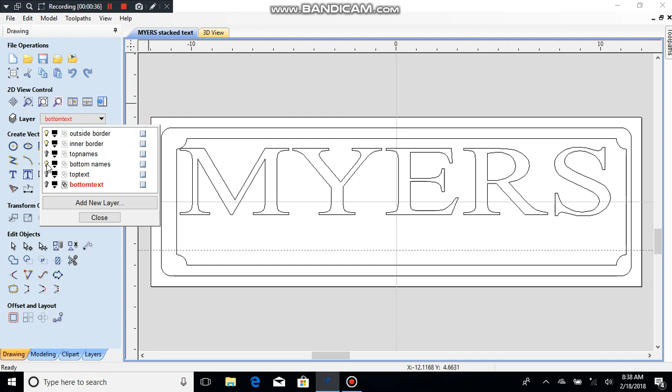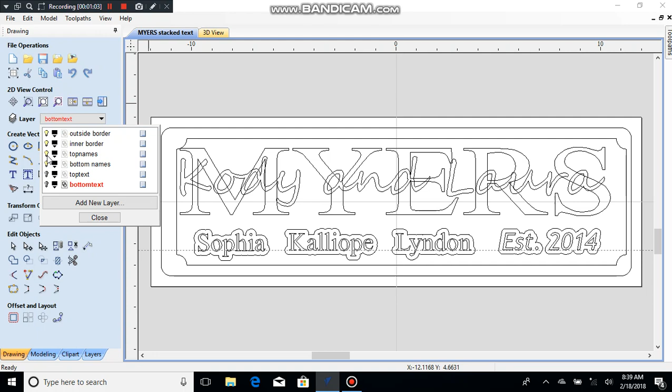I have all my layers turned off. So we're just going to go through: outside border, that's good, inner border, that's good. I can do top names and bottom names, but ultimately those aren't really being used—they're used as a guide. If I would have screwed up something on top text or bottom text, oh, and by the way, that was moved a little bit intentionally, don't sweat it. So if you screwed it up somehow, you could delete top text and bottom text and move it to that layer again in case something was wrong. That's the biggest benefit of having these multiple layers. But remember, the only thing we're actually working with is top text and bottom text, and this overlay problem, don't sweat it.

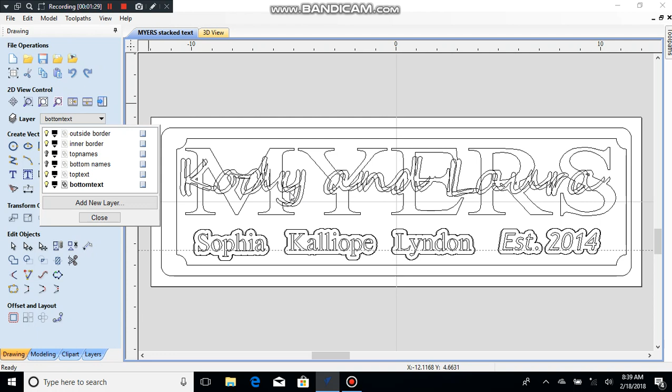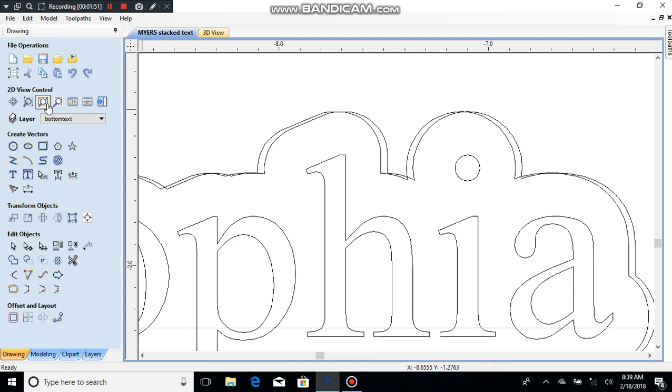Actually, technically, I could highlight that one and delete it, and we'd be back to where we're supposed to be—that's what it should look like. You actually see a little double vector there, again, that was just a mistake. See, I got two vectors here, so that was just a mistake, no big deal. Anyway, on your layers.

So next, basically like I said before, it's done. I don't need to do anything else with this—it's all about, and I've already set up all my tool paths. So what I'm going to do here is pin this so it stays in place. I'm going to go to preview and hit reset preview. There we go, so we'll start off fresh, and we're just going to review it.

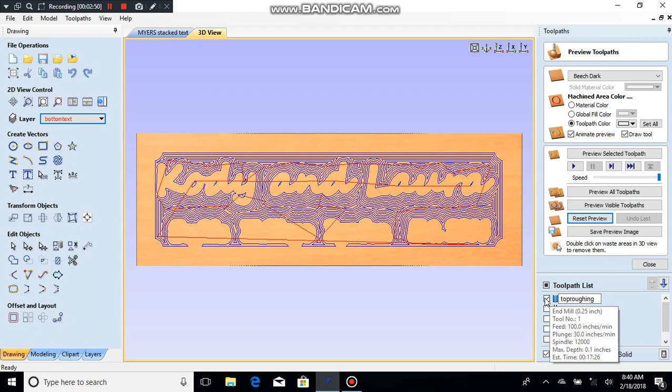So this is your top, top roughing—that's the first one you're going to run. I'm going to go ahead and rename this to top roughing, just my own choice of words so I know what I'm picking off my pendant when it's game time. So top roughing, and this one's top finish, is what I call it.

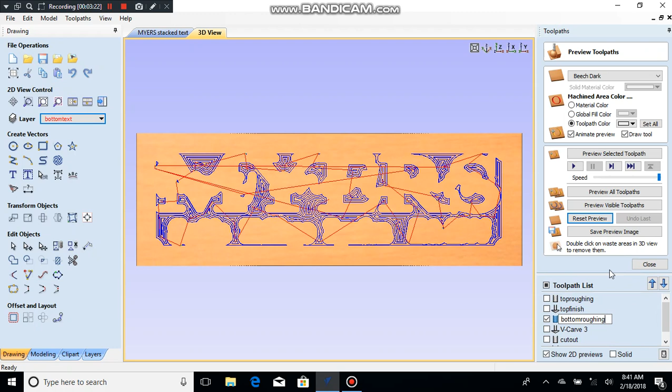Rename top finish, and then this should be bottom roughing—yeah, roughing out those shapes. So we're going to rename bottom roughing and check, and we're going to look at this one. That's your bottom finish, so let's rename that. I have no idea what that's all about. Sorry, alright, rename, and this is bottom finish. Now I guess I am going to add one more thing that I think is relevant—it's just something that can come up.

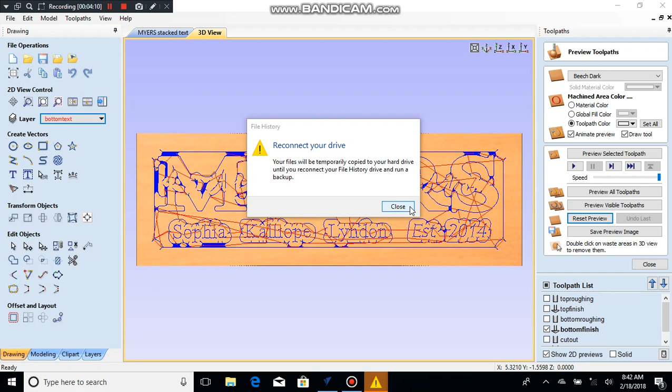I don't know what's going on with this computer. Okay, so last is cutout, and that's going to show us our cutout path. So we're good—kind of irritated with those pop-up screens popping up on me.

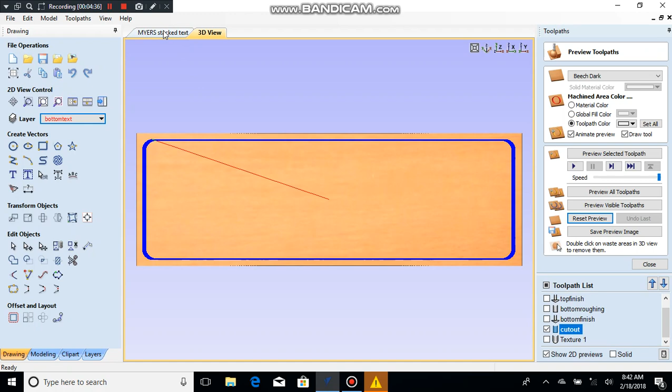One last thing to do, and I think this is relevant. Let's turn on everything on the bottom. These carvings here, of course, that's on the top layer. For some reason, if the zero is not exactly correct when it actually runs this, I've had this happen before where these particular texts don't carve as deep as I really want them to. So I'm going to make an extra file just in case that happens, so I can run it separately when it's all done.

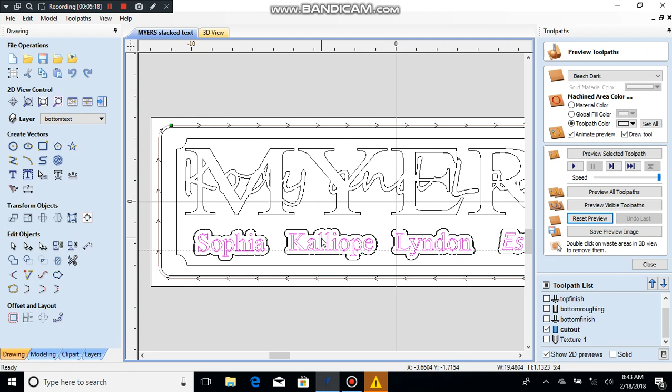If I want to clean it up a little bit, I can just vcarve these items, and I won't have to run a 2-hour file or whatever to make it happen. So let's do that, just like you normally would a vcarve. We're going to do... I don't particularly like 0.2, let's do 0.1. I don't need to flat that one because a 0.25 end mill is not going to fit in those, so I don't need to do it. And flat depth, and that's good.

And I'm going to call this final vcarve, just in case I need it. If I need it, I have it.

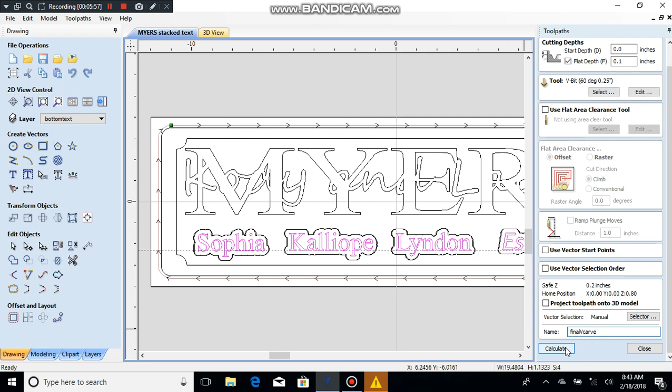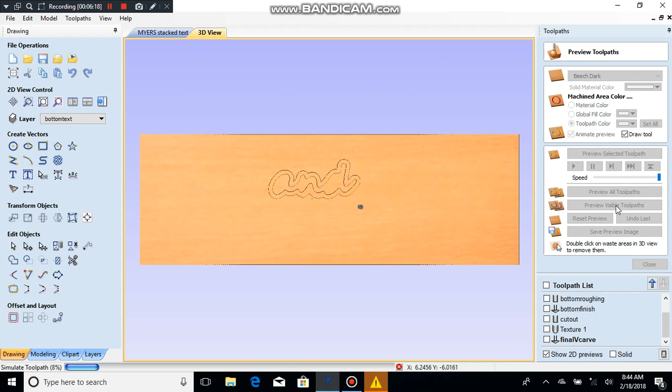Now lastly, some of this stuff has been moved slightly, my mistake, I just hit the wrong buttons. I'm going to highlight all my toolpaths and take out final vcarve. Alright, here I'm going to preview those visible toolpaths, so this should be what it's going to look like when it's all done.

This is going to take at least 2 or 3, maybe 4 hours to run. I don't know about 4, it's pushing it. This is actually slightly smaller than the other ones I've made.

Okay so what I'm going to do is run this final vcarve to make sure it's going to look okay, to see if it looks any different. So I'm going to preview that. Good, so nothing changed, nothing moved. Because imagine doing the whole thing, realizing those names have been moved slightly, and then you run that file and obliterate the whole thing.

So it is done. It's time to move these files, all these files, onto my disk, and they're all labeled appropriately. Forgive me, I'm going to go grab my thumb drive real quick, and we're going to get this done.

Okay, so I'm going to call this Myers. I'm plugging in my thumb drive right now. It should pop up. Give it just a second here. All right, here's my USB.

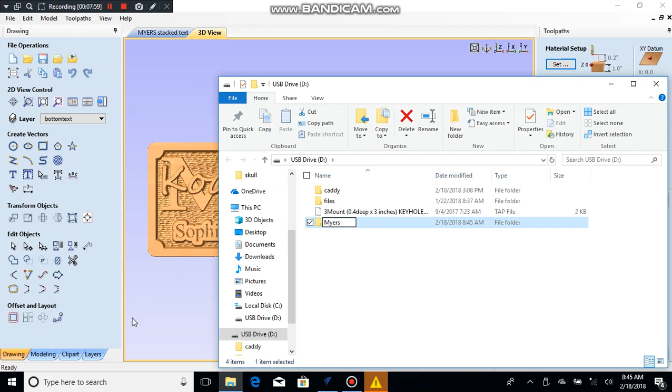Kill it, time to save these. Okay, so I'm gonna just do them in order. All right, top roughing. Now let's see my post processors for the laser, because the last time I ran it was a laser. Make sure you take it back to the one that I want. There's the post processor that I want, and we're gonna save.

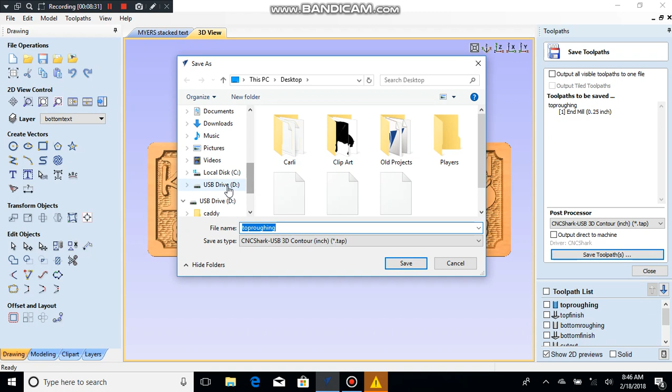We're gonna save top roughing to our D drive. There's Myers. All right, top roughing. Boom, done. Click on top finish.

Top finish is done. Those vcarves take a little bit longer to load onto the disk. Here's our bottom roughing, save. Bottom finish. Save. Cut out, save. This texturing is going to take absolutely the longest one.

I mean, if it's going to be slow, it's going to be this texture one, that's going to be the longest file. Save toolpath, this is our texturing. And here's that final vcarve that we just made. Save, and we are good. I'm going to give it a little bit of a delay to make sure it all gets on the disk.

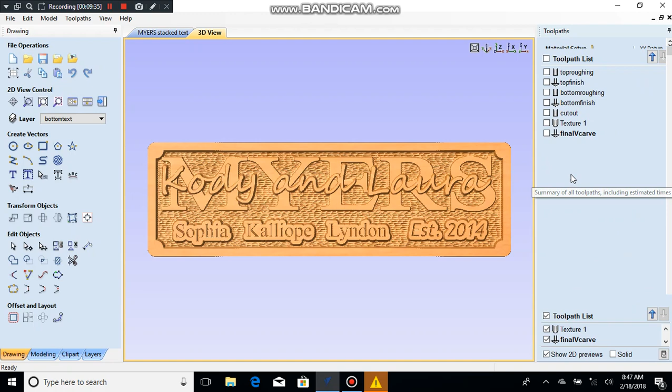And I guess I have like 30 seconds left on this video, so let's do our times real quick. Alright, so we're going to select everything. It says that this is going to take about 3 hours. I have found it takes about 25% longer than anything that it estimates.

And you can see the texturing is showing 1 hour and 35 minutes, that's going to be the longest. Top roughing is about 17. So it'll be, I don't know, it'll probably be approaching 4 hours.